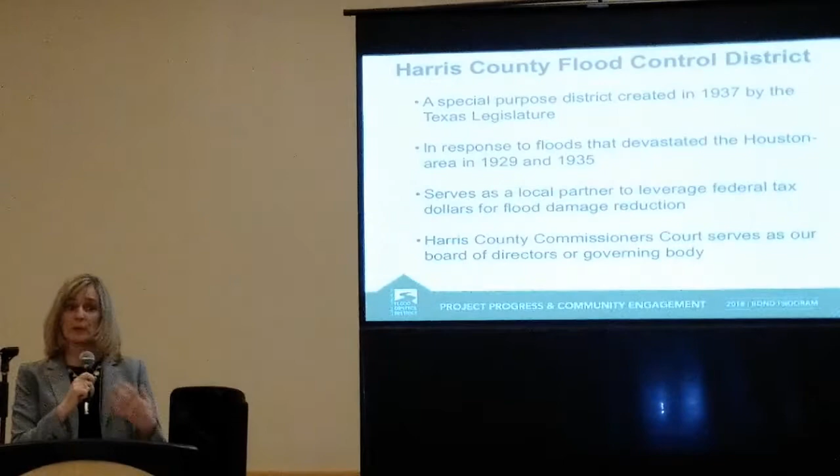Harris County is governed by the Harris County Commissioners Court. A lot of people get confused and think we're part of Harris County. We often partner with Harris County, but we are two separate entities, though both governed by Harris County Commissioners Court. The Flood Control District's mission is to provide flood damage reduction projects that work with appropriate regard for community and natural values.

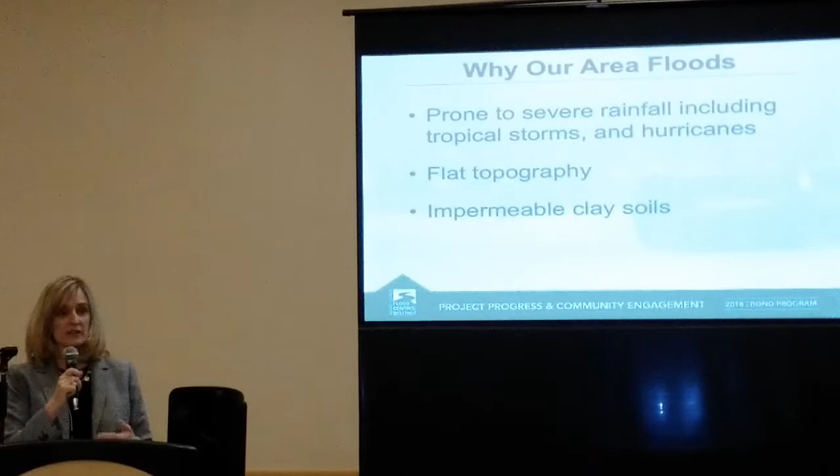The question we often hear when we come out to public meetings is, why are we prone to flooding in Harris County? There's a few reasons for that. One of the main drivers is the type of intense rainstorm events we get—sometimes tropical storms, sometimes hurricanes, and sometimes just really, really hard rainfalls. When that occurs, we can get quite a bit of precipitation depth in a short amount of time. Pair that with our very flat topography, and the clay soils we have, which means there's not a lot of infiltration or good drainage naturally throughout many parts of Harris County, and we get a lot of stormwater runoff. As that runoff tries to make its way to our channel systems, if we don't have enough carrying capacity, or conveyance, in those channel systems, the water starts backing up and pooling along the channels, and unfortunately we start getting into a flooding situation.

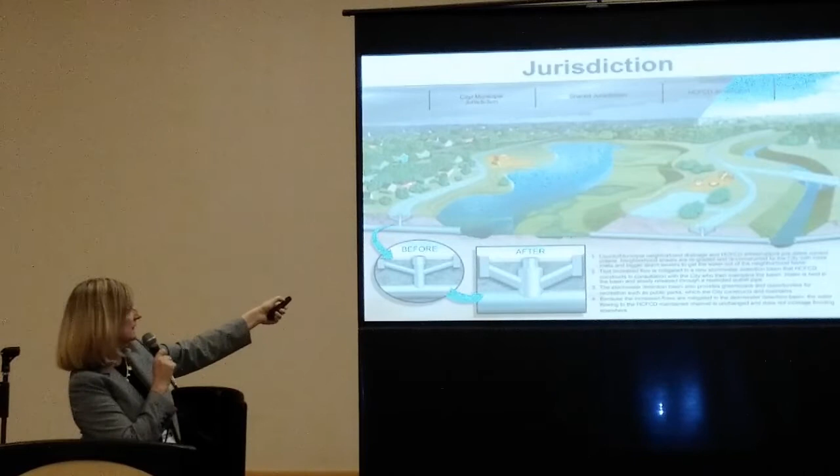We've got several houses in there, a couple of businesses. Those types of neighborhoods are generally served by storm sewer systems or open ditch systems, and the jurisdictions in those areas would be different municipalities—something like the City of Houston, or Harris County might have jurisdiction, or sometimes it's a utility district.

Now when we get over here to the right side of the illustration, you'll see we have a much larger open channel section through here. That's typically where Harris County Flood Control District's jurisdiction comes into play.

Right in the middle, where we've got it shown on this map, it says shared jurisdiction. This is a big stormwater detention pond, and in this case it's shared jurisdiction, providing flood risk reduction for both that open channel and the adjacent neighborhood. We talked earlier about why it floods sometimes, with excess volume of stormwater running off and trying to make its way to the channel. When we build things like this detention basin, that helps provide some of that extra storage, so it's not ponding up along the channel in areas we don't want it to. This helps provide a place to park that excess water.

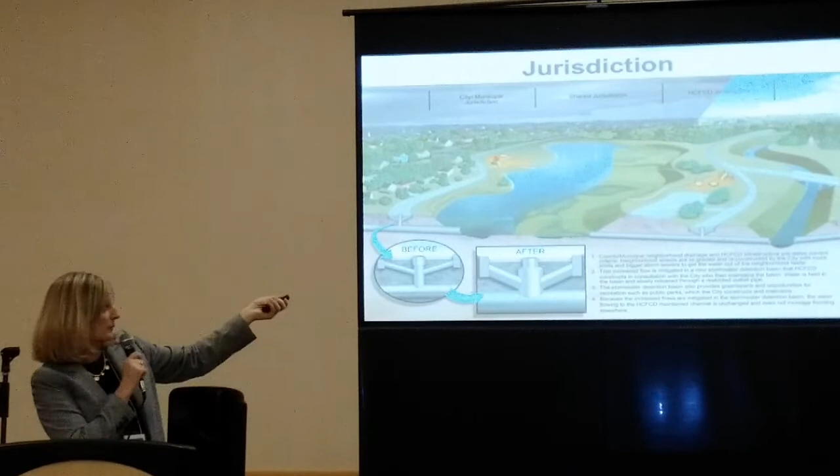On August 25th, 2018, after Hurricane Harvey, voters in Harris County approved during an election to issue bonds to help pay for flood control projects. We had 237 projects across all watersheds, developed both by recommendations from Flood Control District as well as a lot of community outreach meetings similar to this.

In fact, we were at this very location for one of our community outreach meetings. We got a lot of input from the public, and on that list of bond projects, we have 12 for the Sims Bayou watershed.

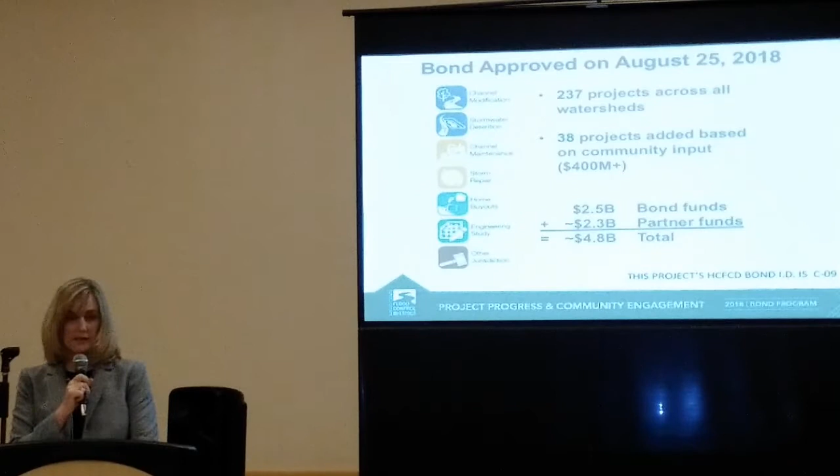In addition to the $2.5 billion that Flood Control will be raising through those bonds, we're also seeking partnership funds from other agencies. We're hoping to pursue up to about $2.3 billion in partnership funds so we can increase that funding for flood control projects from $2.5 billion up to $4.8 or almost $5 billion.

And with that, I'd like to turn things over to Dane Schneider. He's our project manager with our consultant IDS, who did the work for channel C-147, and he's here to talk to you about the proposed projects we'd like to move forward with in the future.

Hello, my name is Dane Schneider. I'm with IDS Engineering, and I'm here to tell you more about the project, the improvements on the tributary to Sims. My first slide shows where the project is in relation to where we're having this meeting right now—it's west of us, near the intersection of South Post Oak and West Fuqua.

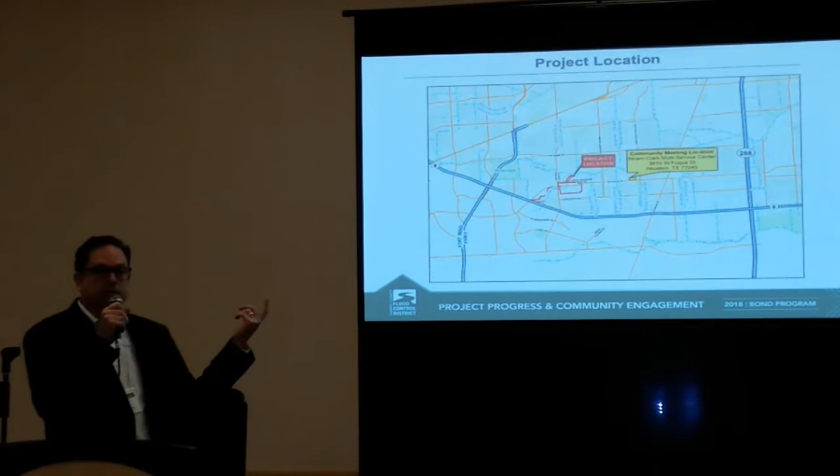The project is located in the Sims watershed, as Dina said, in the upstream end of the watershed, and it encompasses tributary C-147-00-00 to Sims. You'll hear us use the word tributary throughout the presentation—a tributary is basically a smaller channel that conveys or delivers flows to a larger bayou or channel such as Sims Bayou. I'll probably shorten tributary C-147-00-00 to just the tributary, or C-147, since saying the full name repeatedly gets a bit much. The drainage area for C-147 actually overlays Harris County and Fort Bend County, shown in the black line here.

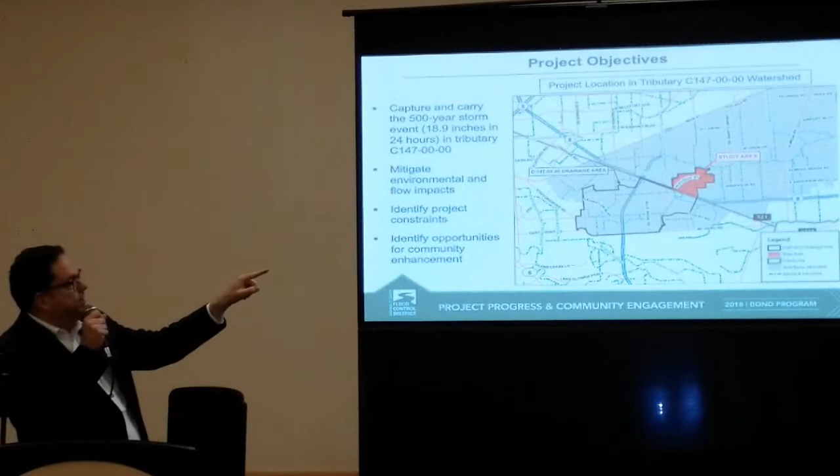The study area for the improvements on the channel was done in the red area, which is Harris County only. So the area studied for flood reduction only includes the drainage area in Harris County.

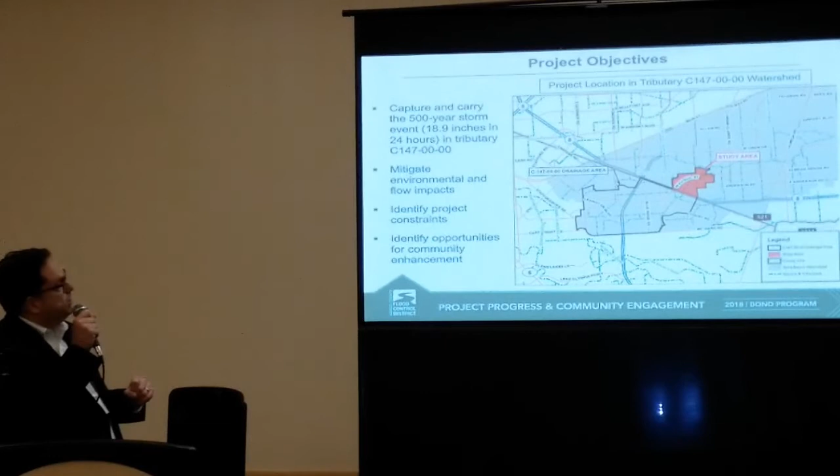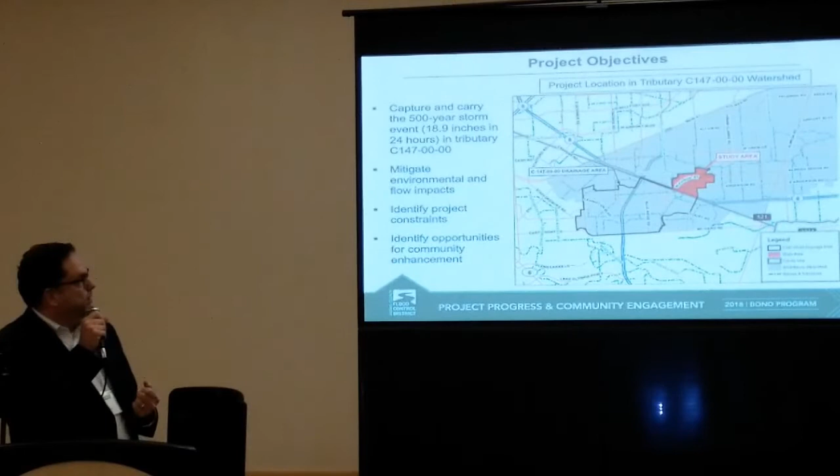There were several objectives developed for the project. The four primary objectives were: we wanted tributary C-147, at the end of the project, to capture and convey the 500-year storm event—in terms of rainfall, that's an event delivering about 19 inches of rainfall over a 24-hour period. We also needed to mitigate any environmental or flow impacts from the improvements made on the channel, identify any project constraints or boundary conditions to delivery of the project, and, following Harris County's mission, identify any opportunities for community enhancement in the area.

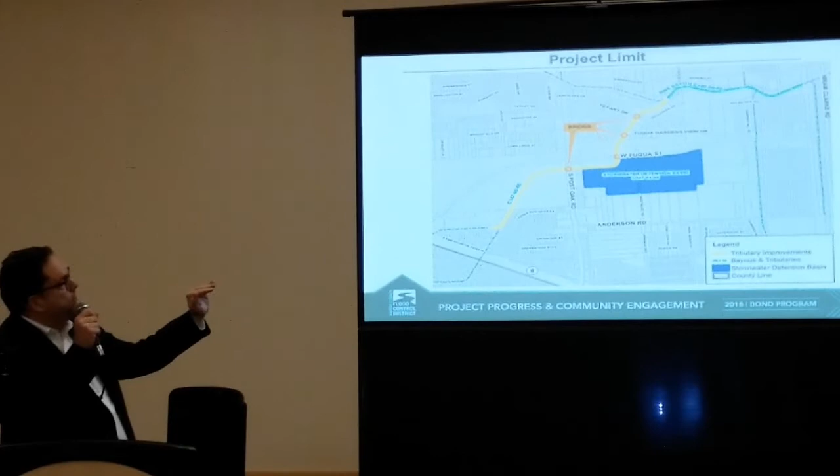Zooming in on the project limits, there are basically three elements to the project. One is the tributary of C-147 from Anderson Road downstream to Sims Bayou. The direction of flow on the tributary is from southwest to northeast to Sims, and then Sims flows to the east.

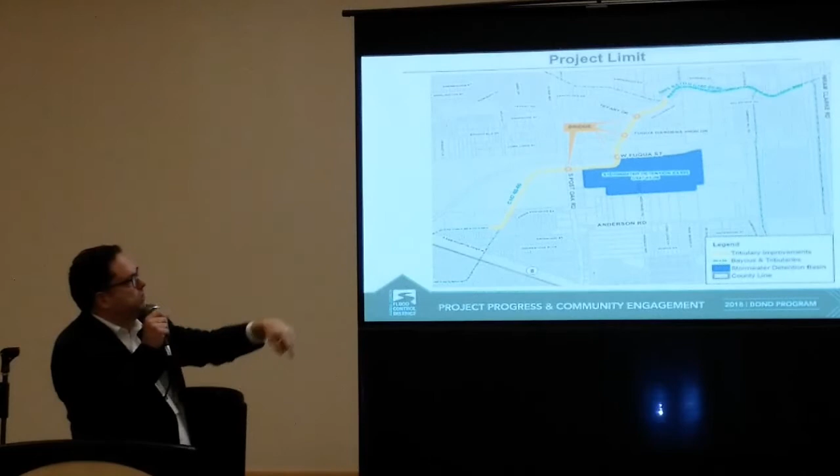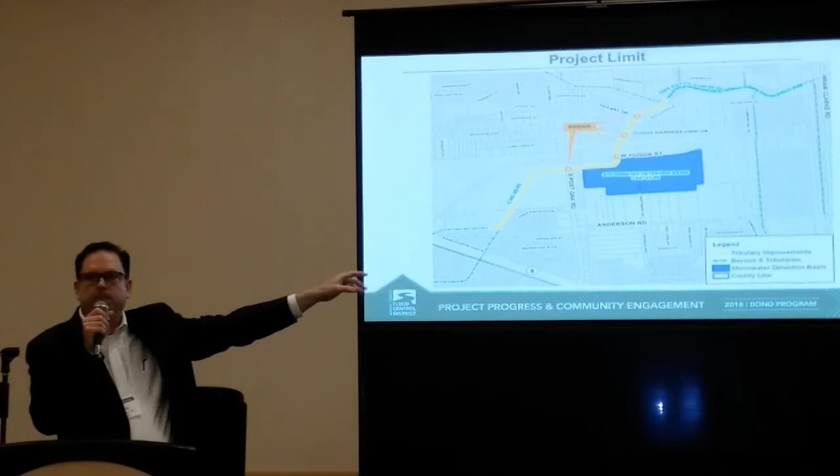The other component of this is the existing dry bottom stormwater detention basin called C547-01-00. I'll shorten that throughout and just call it the basin, or basin C547.

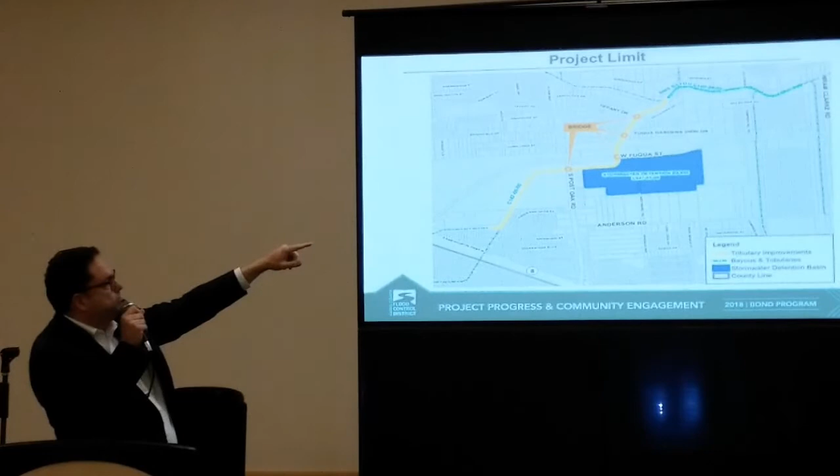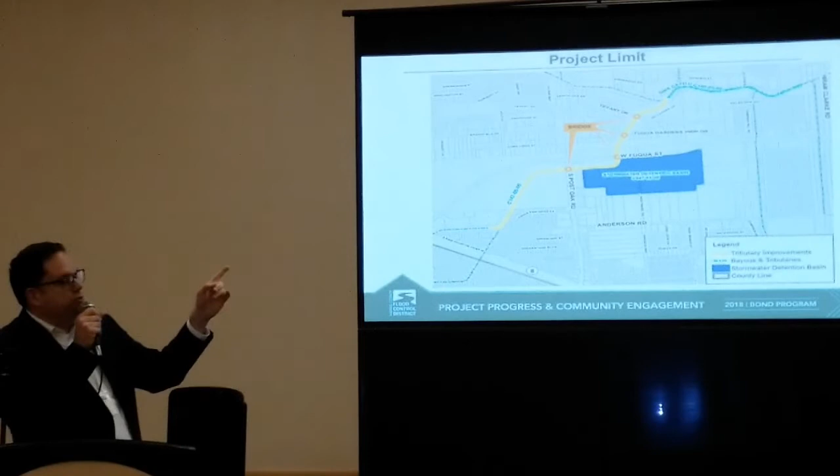The third component of this are the bridges. We have a bridge at Tiffany Drive, a bridge at Fuqua Gardens, a bridge at West Fuqua, and the large bridge at South Post Oak Road. The plan is to replace Tiffany, Fuqua Gardens, and South Post Oak, and to modify the West Fuqua Bridge since it's relatively new. We did visit with the City of Houston since the bridges exist in City of Houston street right of way, and we'll be modifying the channel under the West Fuqua Bridge. At least that's what's proposed right now, to not have to replace that bridge.

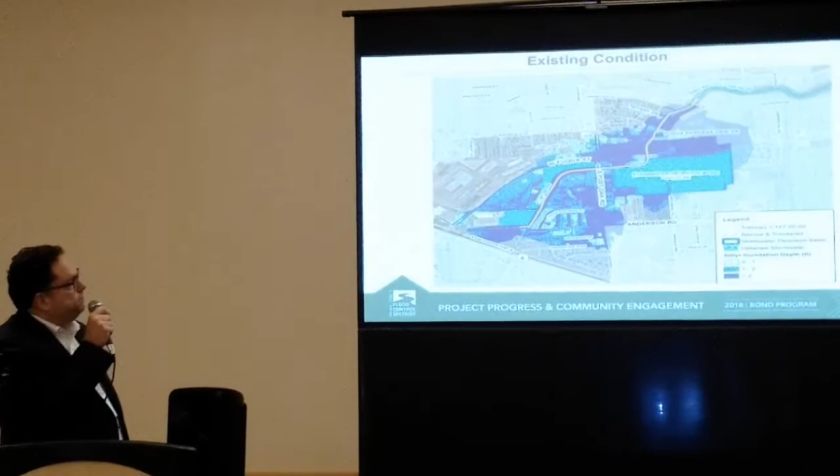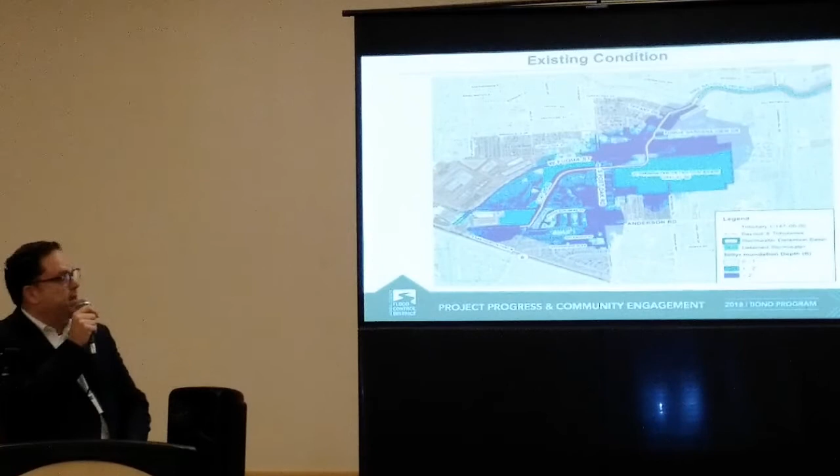This is a snapshot of the existing area of inundation. When the Sims Bayou federal project completed around 2015, a joint project between Harris County Flood Control District and the U.S. Army Corps of Engineers, it greatly reduced the risk of structural flooding along Sims Bayou. However, today there still is a risk of inundation or structural flooding in the C-147 watershed, largely due to the inadequate conveyance capacity on tributary C-147.

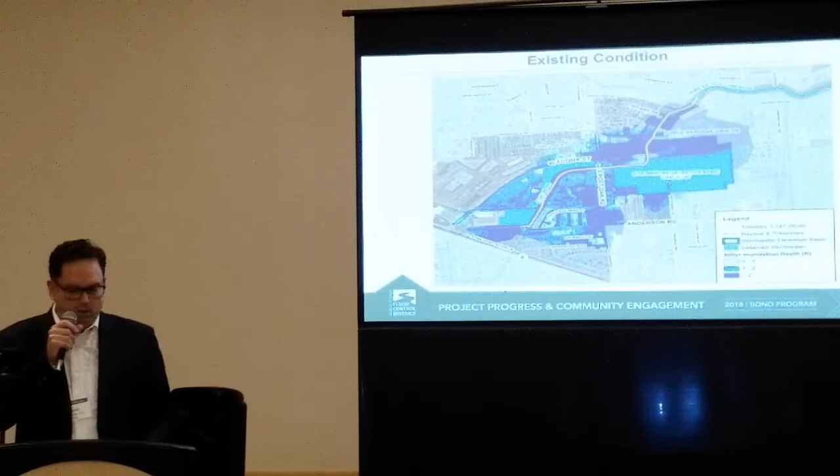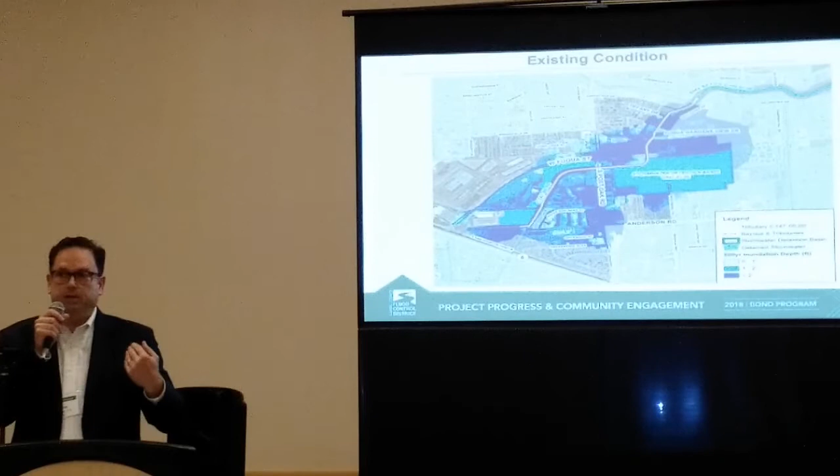When we talk about channels, we talk about their ability to contain and convey a particular storm event. Today's tributary C-147 only has the ability to carry about a 10-year storm event. Our objective is containing 19 inches of rain in 24 hours. Today, the channel is only able to carry a 10-year event, about 9 inches of rain in a 24-hour period before it overtops.

This is the result of that overtopping or spillover. The floodwaters just spread around the area adjacent to the tributary.

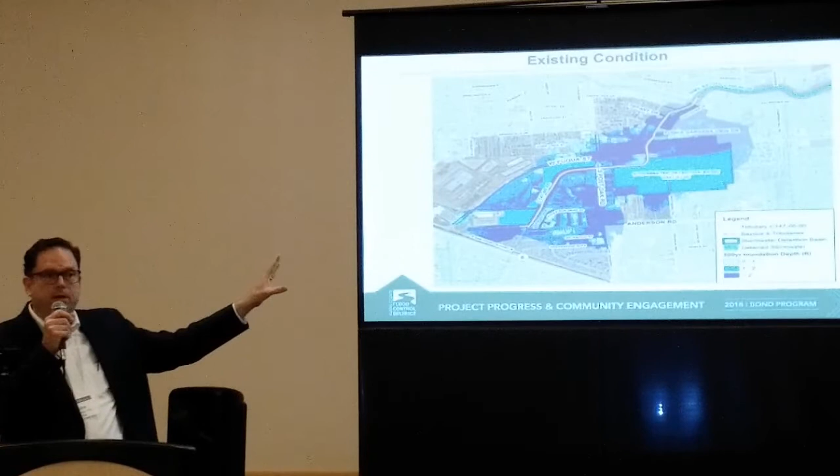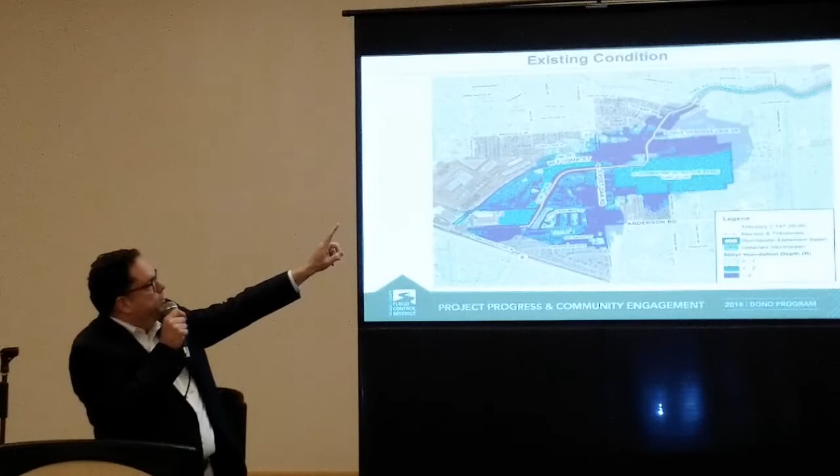Before we move to the next slide, I wanted to point out a couple of things. One is that the basin is connected to the tributary, right between South Post Oak and West Fuqua. It's important to realize that the two facilities work together as a system to reduce the risk of flooding in the area.

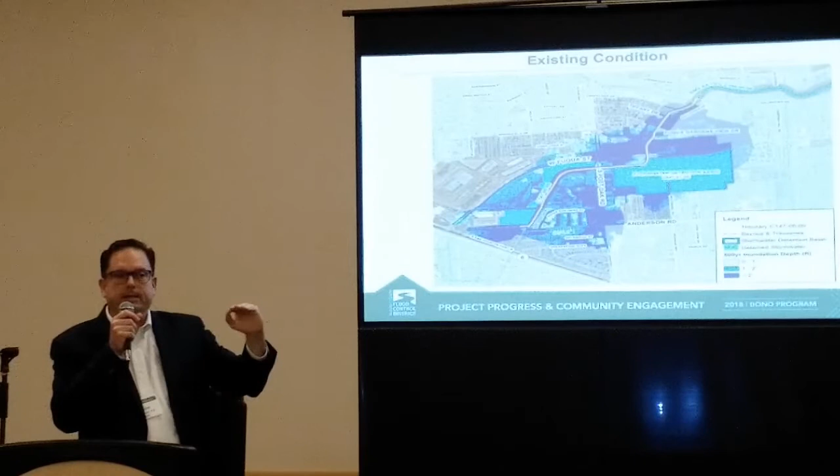I'm going to show you some sections in a minute that are the proposed widening and deepening on the channel. One is going to be from Anderson downstream to that connection at the basin, and the other is going to be from the connection at the basin downstream to Sims Bayou.

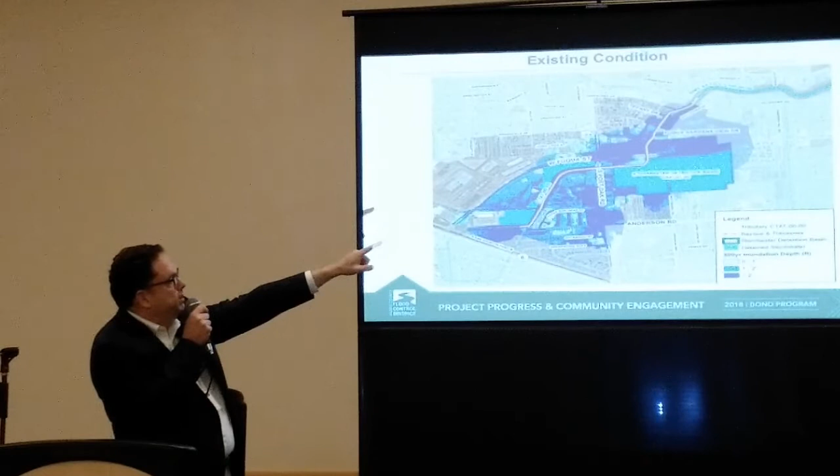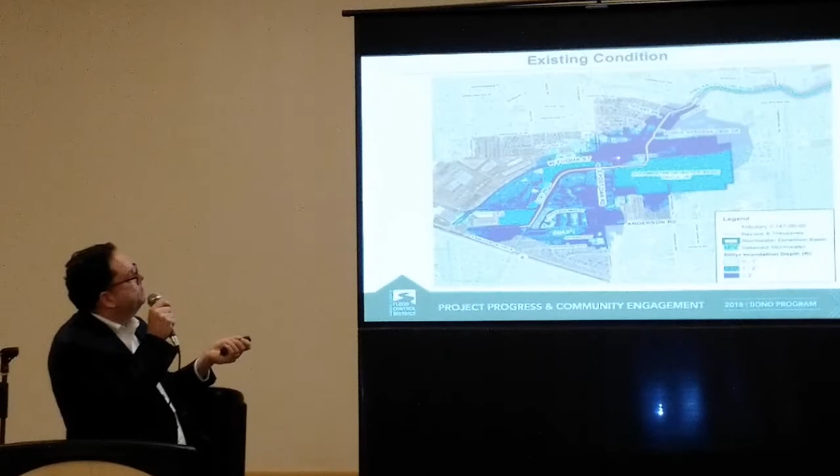Here's South Post Oak, here's Fuqua Gardens View, here's Tiffany Drive, and here's West Fuqua coming along to here. To reorient you, here's Sims Bayou up here, and the channel and the basin are connected right here between West Fuqua and South Post Oak. C-147 is the yellow line right here, and this is where it connects to Sims. It flows from here northeast and connects with Sims.

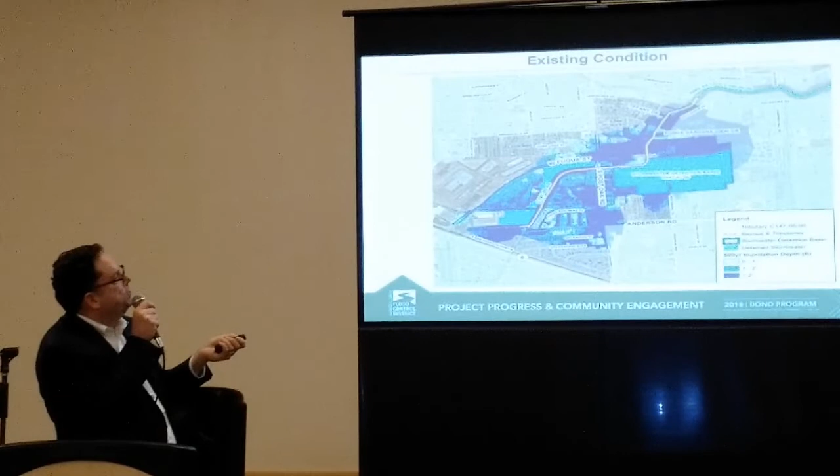The sections on the next slide that I'm going to show you are basically split at the connection to the basin, which is the dividing point between the section proposed downstream and the section proposed upstream of the connection point.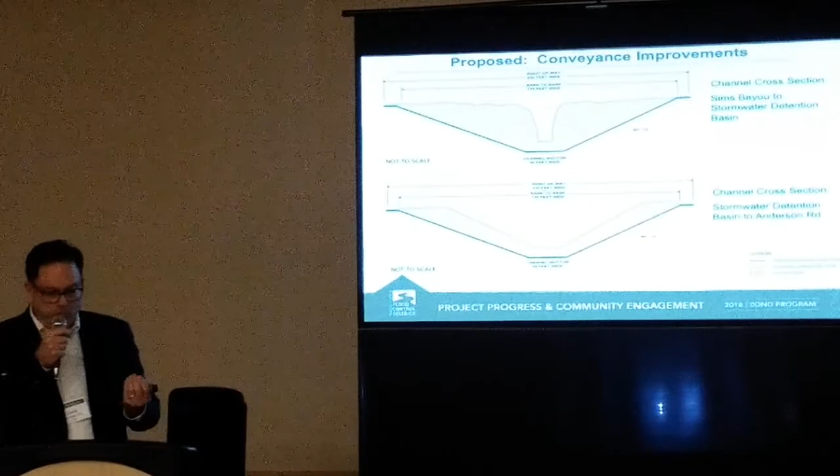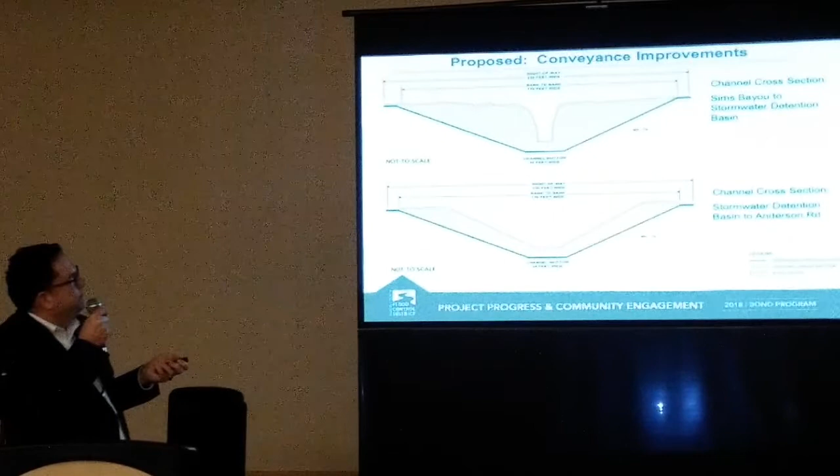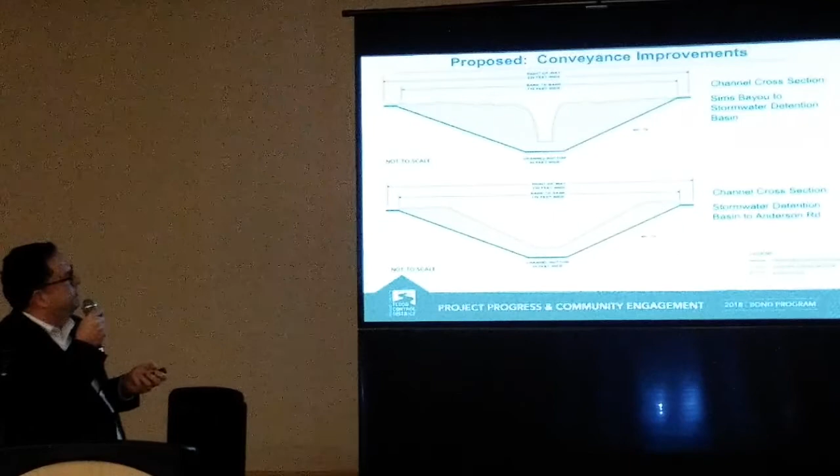This slide shows that more conveyance capacity in the channel is achieved by widening and deepening it. The gray line represents the existing cross-section of the channel out there today. The blue line represents the proposed cross-section, and we've shaded in the area that would need to be excavated in red. It's difficult to see here, but you're correct—it's what we'd call a uniform cross-section along the entire length of the project.

This would be removed downstream of the connection with the basin, and this would be the earth removal upstream of the connection with the basin.

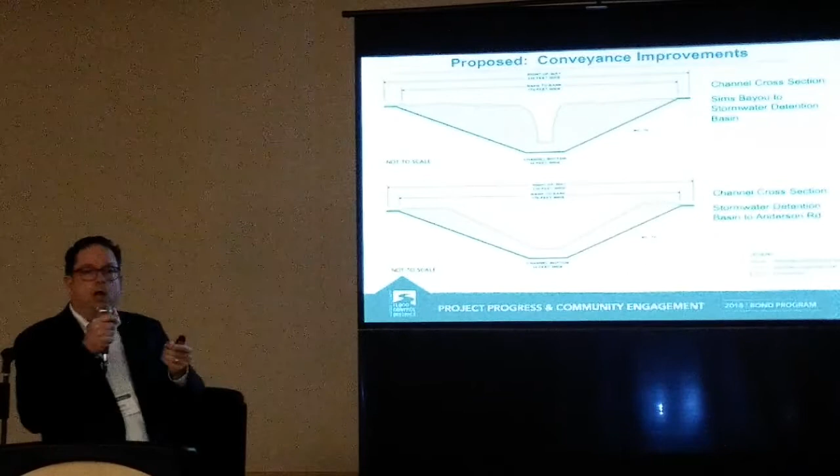One other major component of the project, because Tributary C-147 is connected to basin C-547, is expansion of the existing basin.

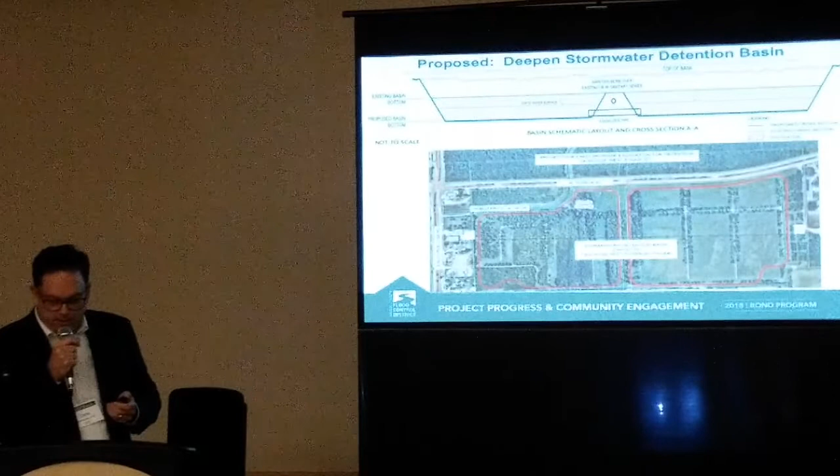The existing storage volume is approximately 25 million cubic feet in the existing basin, which is a dry bottom basin. This is an actual aerial photograph of how the basin looks today. I cut a section through here, and this gray line represents the bottom of the detention basin today. A rainfall event comes, fills the basin up, it runs out, and then the basin remains dry most of the other time.

In order to deliver the project and mitigate the impact of flows, it's necessary to expand the volume in the stormwater detention basin. We're basically doubling it, expanding the volume to about 44 million cubic feet. To maximize storage, it will become what we call a wet bottom basin, so its normal appearance will be more like a pond than a dry bottom basin—you won't see grass or trees in the bottom. The blue line here represents the proposed basin bottom with the project.

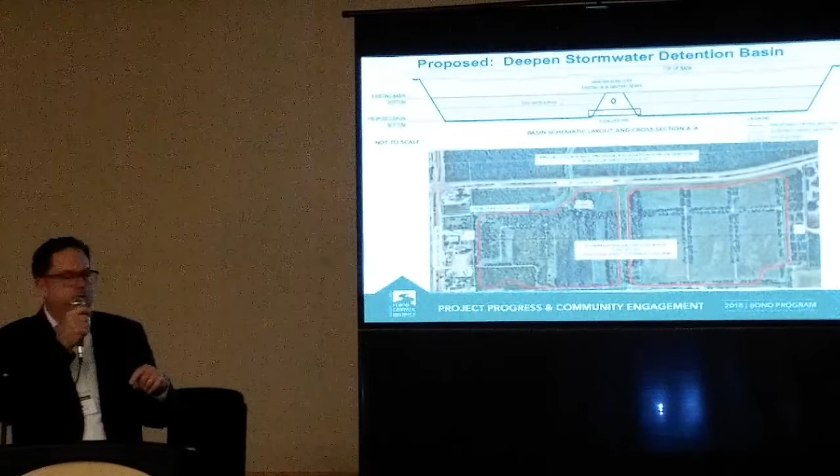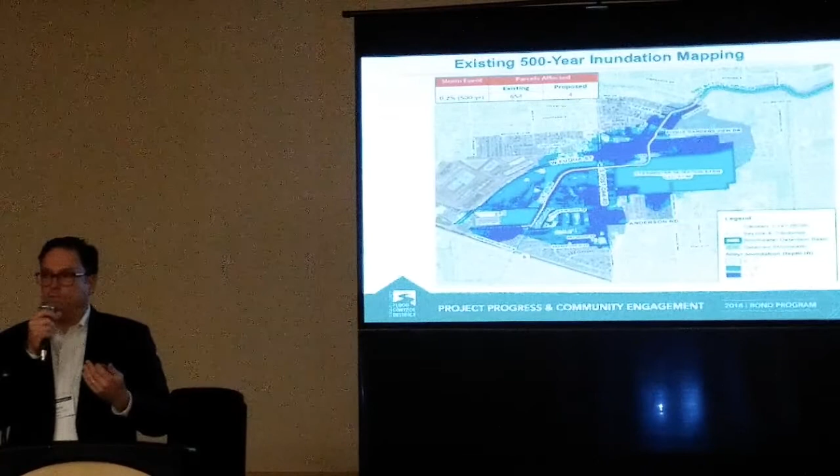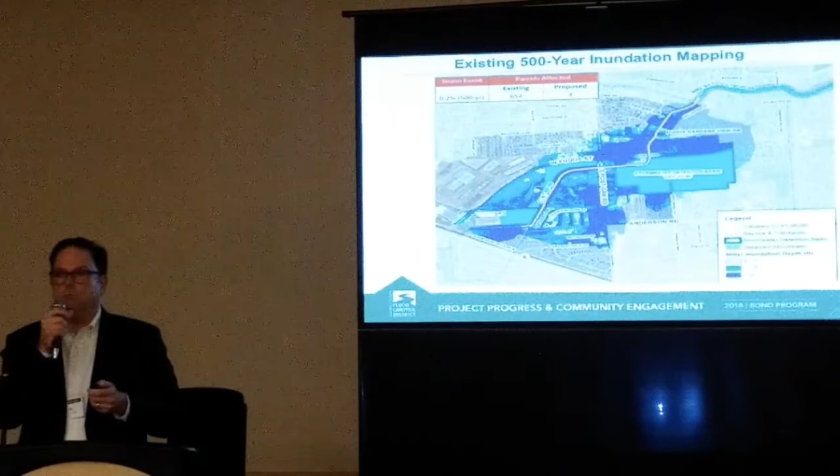I'm returning to this inundation map again, just to remind you of the way things look today in terms of inundation during the 500-year storm event. The data tells us that about 654 properties are impacted today during a 500-year storm event. So what I've brought to show you here is the model's simulation of what happens today during the 500-year storm event.

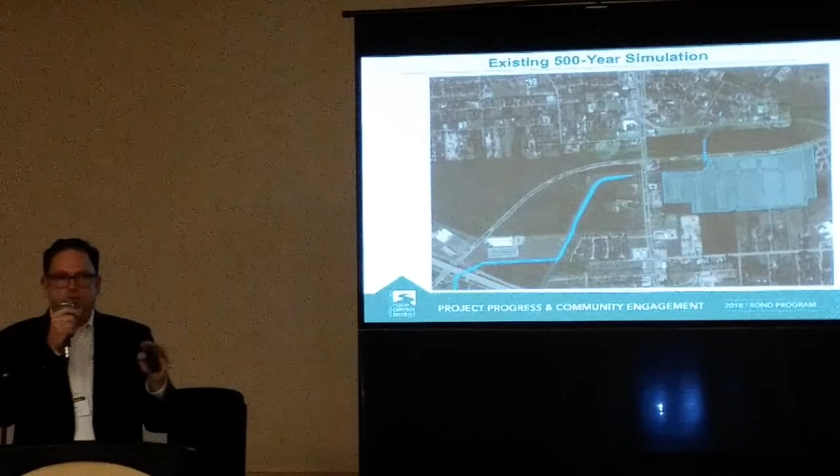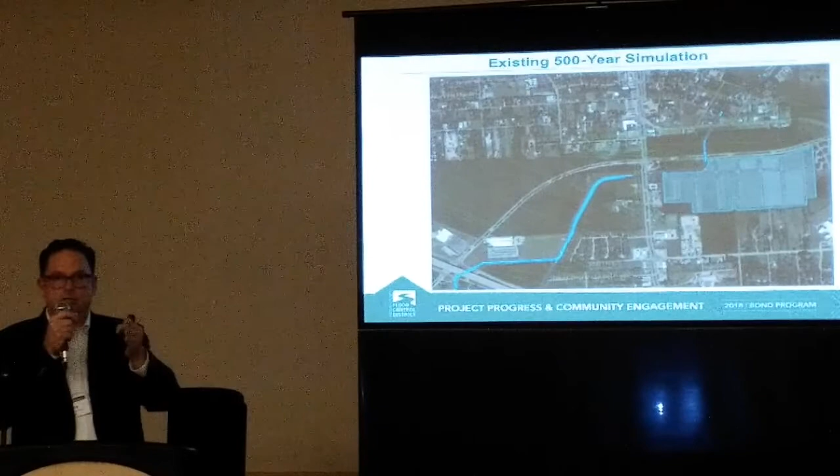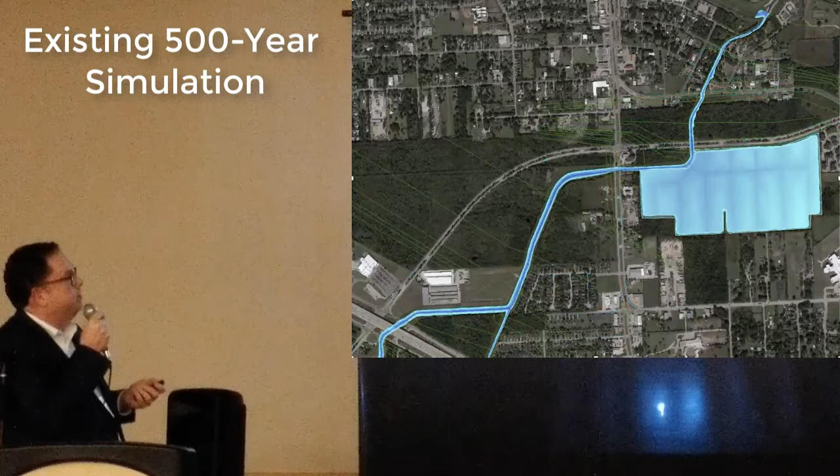This is pretty cool. You're going to see the channel fill up, the basin fill up, the water spilling over the top of bank of the channel, and then draining back down and emptying out of the basin—all of it on its way to Sims. You see the basin filling up, and once that 25 million cubic feet of volume is exhausted, the basin or the channel overtops, and you see the flooding in the area. This is what's happening today for a 500-year storm event.

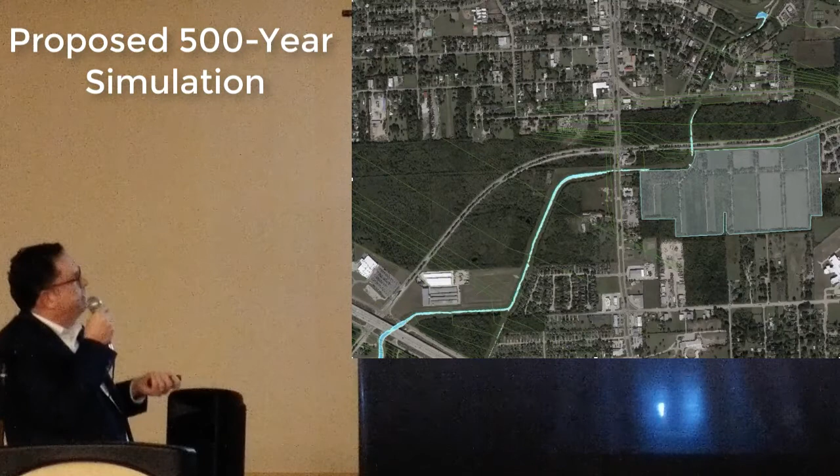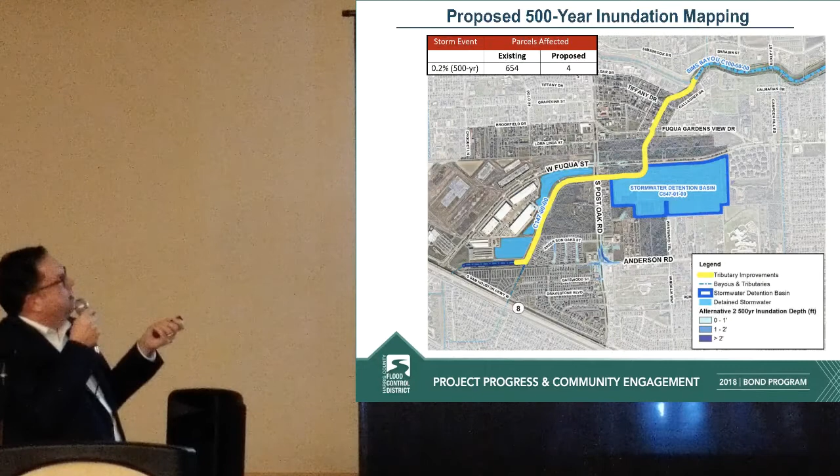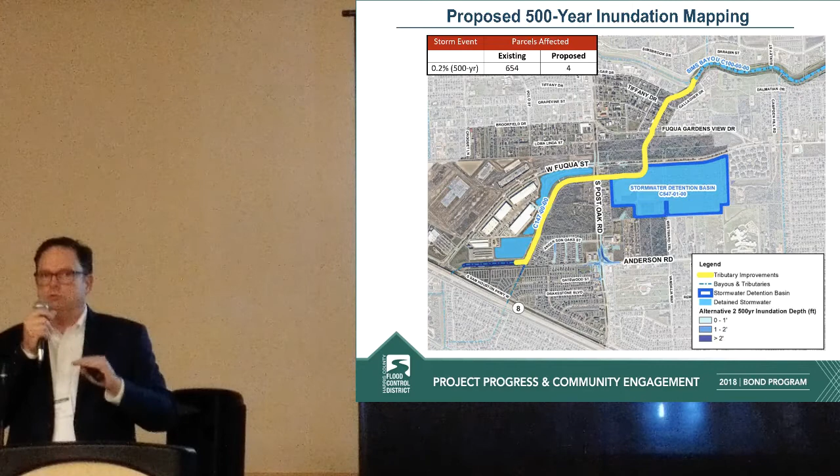So what we're proposing—this is a snapshot of the same area. You have improvements along the tributary, improvements in the basin, and this is what the inundation map looks like when the project is done. You don't see any blue up there hardly at all. I want to point out this number: the model tells us that about 4 parcels are affected by inundation, but we're seeing that as a pretty low number. We don't anticipate any structural flooding once the project is implemented.

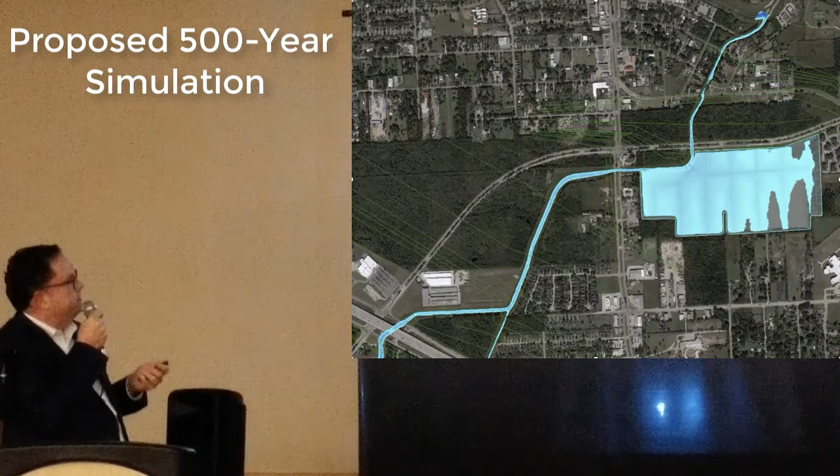We also brought for you a video of what happens after the project is fully implemented. Channel fills up, basin fills up, basin empties out, channel goes down—there's no spillover. So the improvements completely contain the 500-year event.

Anybody want to see that again? Yes. These are thanks to Adam. Thanks to Adam.

So there's two things going on out here. This is a diversion channel that was recently constructed, called C-147-02-00. It doesn't have a cute name. And then this is the extension of C-147-00-00 that didn't see improvements. Today, the bulk of the water coming out of Fort Bend County flows out of C-147-02, hits the C-147-00, and then keeps flowing in this direction—everything flows, and then shoots east to the ship channel.

And so you're saying you're not worried about that stuff to the south—that's what you just said? I didn't say I'm not worried about that stuff to the south. The stuff to the south is not in the scope of the project. The project is being sponsored by Harris County Flood Control District and is occurring in Harris County. Everything south of the Beltway is Fort Bend County.

One of the opportunities for community enhancements we realized was the chance to connect to the Sims Bayou Greenway project being completed by the Houston Parks Board. If you look at this green line going down to this yellow line on the screen, you'll see what's there right now, which is a pedestrian bridge at Simsbrook and Buxley that crosses over the channel today.

Harris County Precinct 1 sees an opportunity for extending the Sims Greenway hike and bike trails as part of this project. We conceptualized this to get their input on whether they'd be behind doing this, and they're definitely a proponent of it.

So we've drawn here basically what could happen, shown in yellow. You follow the channel down, and then there would be opportunity for trails around the basins. The yellow line could go all the way down to the Beltway and hook in with the neighborhood along Anderson Road.

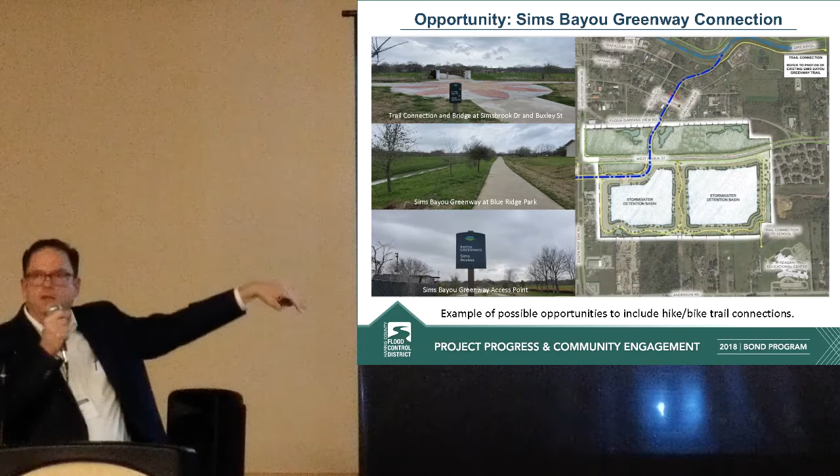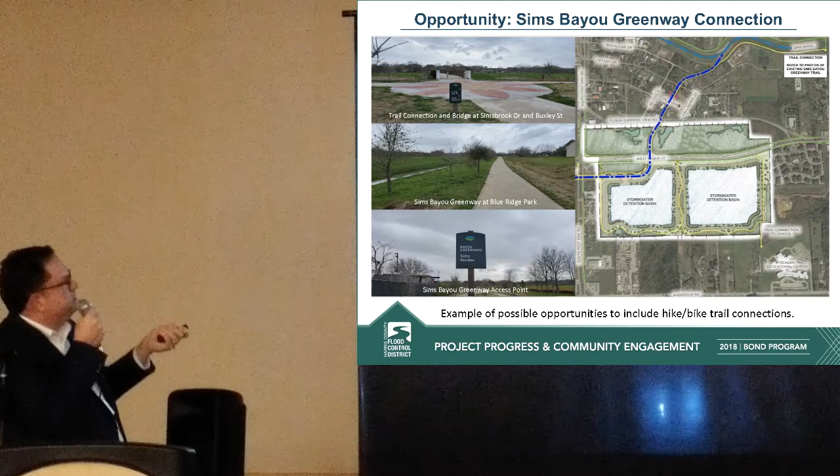Some of these other pictures are just an example of how great the Sims Greenway looks. This is the section by Blue Ridge Park, west of South Post Oak around Croquet. And this is just a marker for an entry to the trail.

So are they thinking of implementing sidewalks, where they will walk along the Bayou, basically? Yes, kind of like around the city park, where they made a new park and you can walk the trail. Yes, very similar to that.

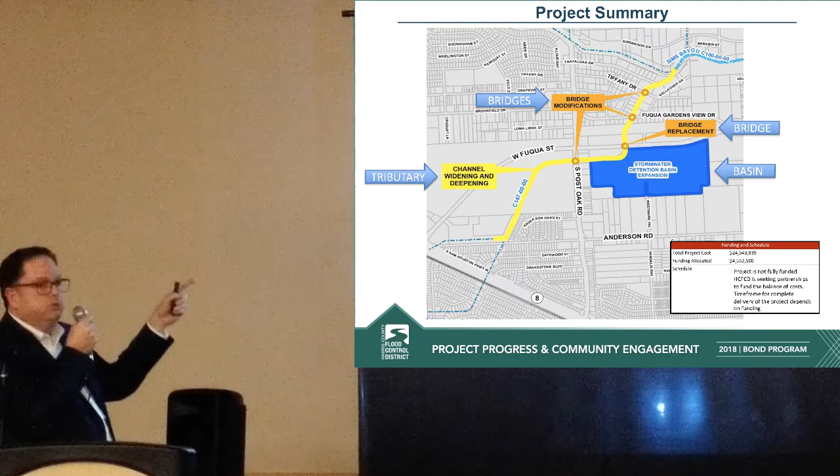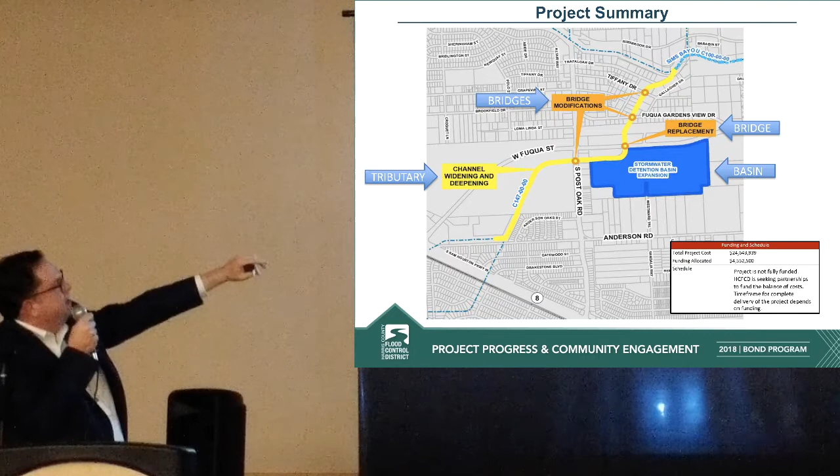So the next slide pretty much summarizes the project. We have the channel widening, or the tributary, I'm sorry. We have the bridges, and we have the basin. So those are the three components of the project.

Just to let you know where we are in terms of funding and schedule: IDS is in the process of completing the preliminary engineering phase of the project. The preliminary engineering report is due to Harris County Flood Control District next month, and part of that timeframe includes input from the community, so you definitely need to provide input on the forms or verbally tonight.

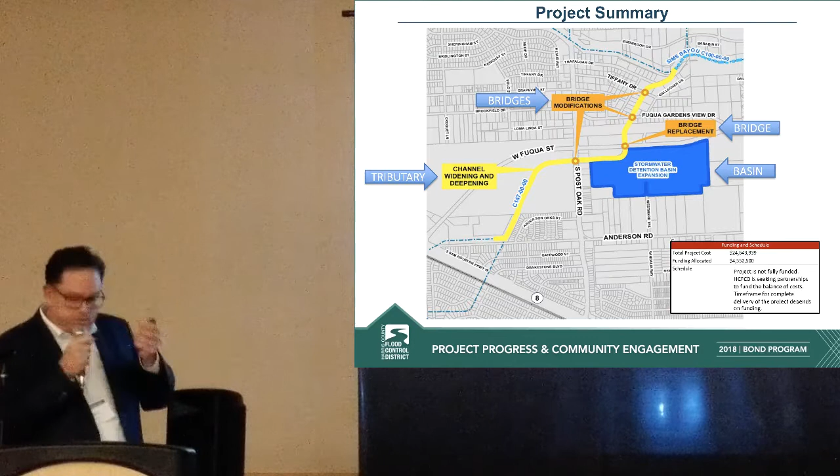The other thing I wanted to point out is the estimated total cost of the project is about $25 million. The current allocated funding from the 2018 Harris County Flood Control District Bond Program, approved by voters on August 25th, 2018, is approximately $4.5 million. So you can see there's a gap between the cost of implementing this project and the amount of bond funding allocated for it.

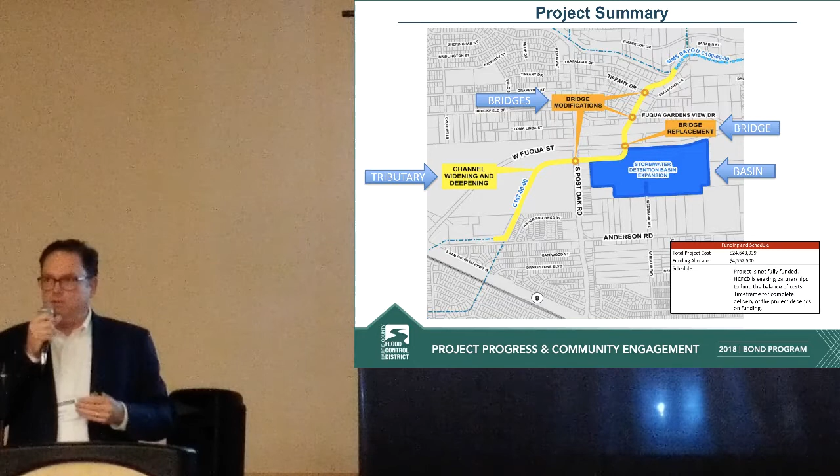So at this point, IDS is working with flood control. We are in the preliminary engineering phase of the project. A certain amount of funding has been secured, and flood control is in the process of pursuing other sources of funding, attempting to secure funding from federal sources or potentially community partners. There's a constant ongoing activity to secure the additional funding needed to implement the project.

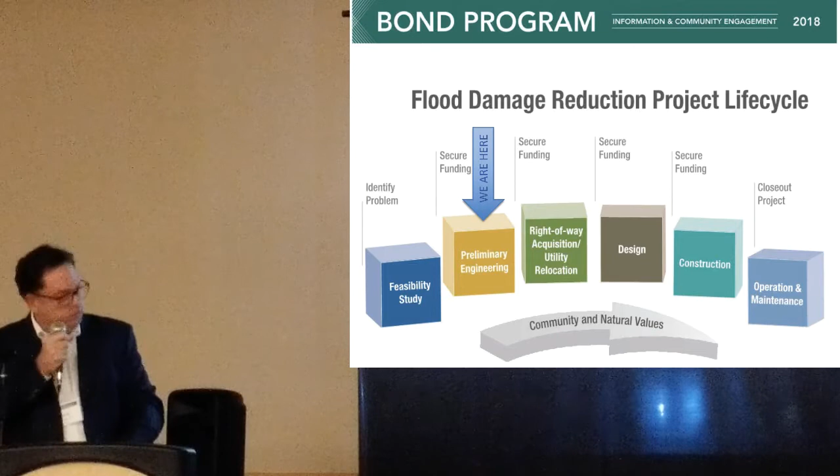Flood control has also asked IDS to look at different ways the project could be implemented in phases, such that once you got to the last phase of the project, you would get the whole package and see those flood risk reduction benefits. That's it, thank you.